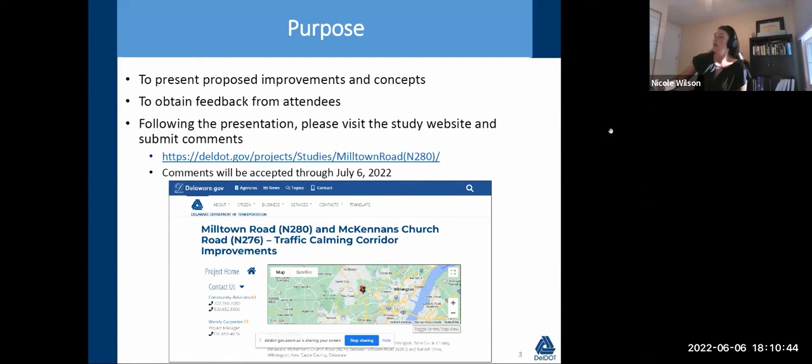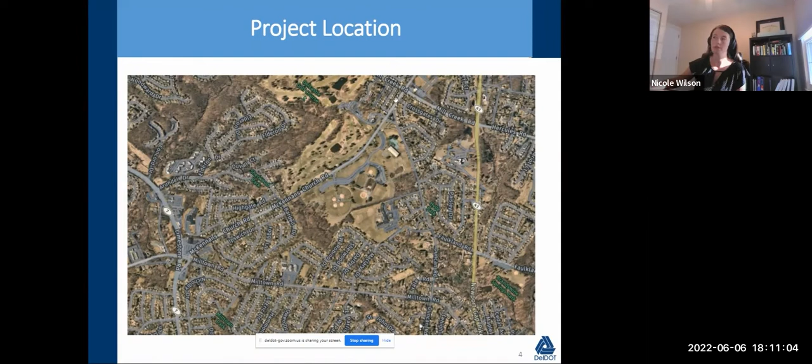So I'm going to go through a little bit of history for each of these corridors really quickly before we touch on our actual concepts. But for Milltown Road, we did collect speed data. There was a speeding issue observed, with the 85th percentile speed of 48 miles per hour.

After that, we did install one radar speed sign in 2020. We did a truck restriction inventory as a result of some other concerns regarding truck traffic on the roadway. And then we did a speed limit study in July of 2021, which didn't recommend a reduced speed limit. After that, we put a radar speed sign in the opposite direction and did a further truck restriction inventory on the ends of the corridor.

So here's a slide for the McKennans Church Road history. This one goes back a little further. I found some history on police enforcement in 2017, but then we did collect that speed data, which also showed an 85th percentile above the posted speed limit. We conducted a speed limit sign inventory and a speed limit study, finding that a reduced speed limit was warranted north of Bardell Drive—used to be 40, now it's 35. Additional signage was installed for speed limits and no passing on the shoulder. We also have radar speed signs, now 2 on this corridor, with the most recent one installed last month.

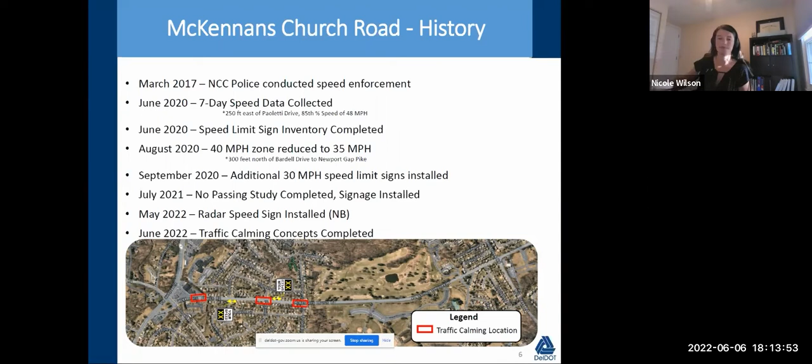Just a real quick slide—we wanted to touch on the existing conditions of each of these roads. They are slightly different, but they both did have speeding issues, with the 85th percentile 11 to 13 miles per hour over the posted speed limit. So this is why we are looking into these traffic calming options.

And we did take a look at the crash data, which we wanted to note here. As I said, each of these roadways is a little bit different, but on Milltown Road, half of them were injury crashes, and McKennans Church Road did have a lot of crashes in the past 3 years. This is our existing conditions, and if we move forward with these traffic calming options, we'd like to see how that changes in the future.

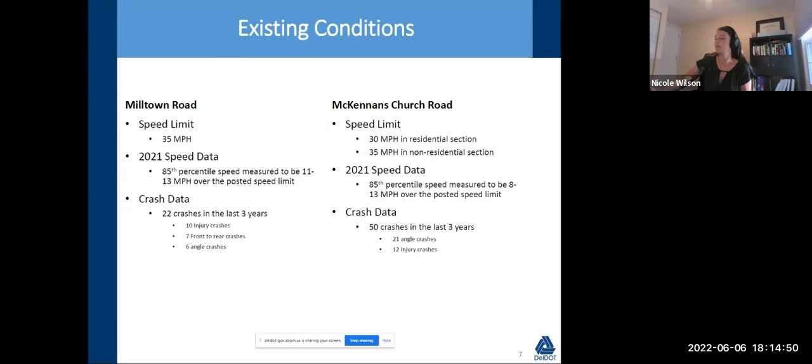So what are our proposed improvements? We are suggesting median islands with pedestrian crossings and rectangular rapid flashing beacons. This would provide physical roadway narrowing and horizontal deflection in the roadway, as well as a safe pedestrian crossing to get across the street. These would be activated by pushing a button, so they wouldn't be flashing all the time, only when a pedestrian is trying to cross, and it would have little to no impact on emergency vehicles.

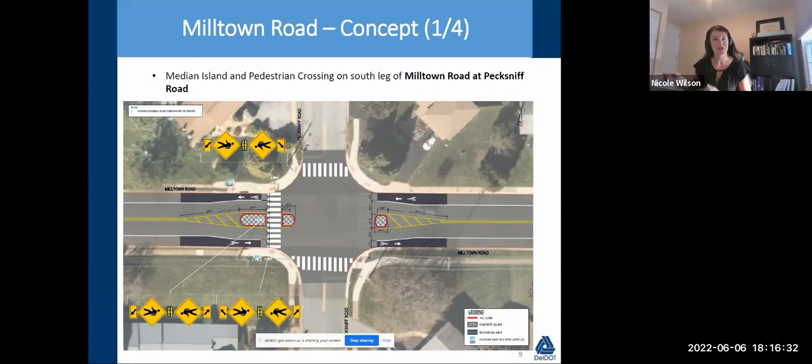As I said, Milltown Road has 4 locations where we're suggesting these median islands. This is the first of 4: the south leg of Milltown Road at Pecksniff Road, where we're suggesting this median island to provide horizontal deflection in the roadway and help calm those speeds down a little bit. I'm not going to spend too long going through each of these—they're all relatively the same thing, just in different locations on the corridor. But this is the first one.

The second one is actually at St. John's Church. This one would provide a connection for those crossing—there's a school there, church activities, things of that nature.

The third one is just south of McClary Drive. There's an existing bus stop on the north side—just another median island. This one is not at an intersection per se; it's kind of mid-block.

And the fourth one is just north of Dartmouth Road. This one would connect those two bus stops as you see in the imagery. But all of these could change a little bit—10 feet to the east, 10 feet to the west—this is the concept plan. So there's still some wiggle room with the exact locations, but this is where we're expecting them. So those were the 4 Milltown Road concepts.

Now I think we're going to the McKennans Church Road concepts. So the first one on McKennans Church Road—I'm sorry, I'm just noticing now this says Milltown Road, but it's meant to be McKennans Church Road—would provide access to the shopping center from the apartments, kind of mid-block, not an intersection, to help slow speeds as they approach or come out of that residential section.

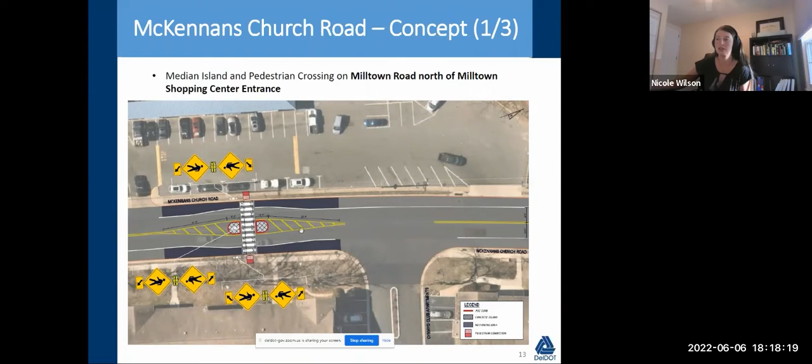The second one of the 3 is just south of Pecksniff Road, on the south leg. This is similar to the one on Milltown Road at Pecksniff—similar kind of design. But again, all of these have these rectangular rapid flashing beacons that you can press to cross the roads.

And the third one is just on the south leg of Bardell Drive. So again, these are all very similar. We just wanted to show you a detailed look at how this would affect certain driveways or intersections, things like that.

We did want to talk about the project schedule and next steps. Today was our working group meeting, with a comment period going out for one month. So we could initiate the design phase this fall, with an anticipated construction phase of fall 2023 or spring 2024, pending anything we find in the field that could cause challenges for these designs.

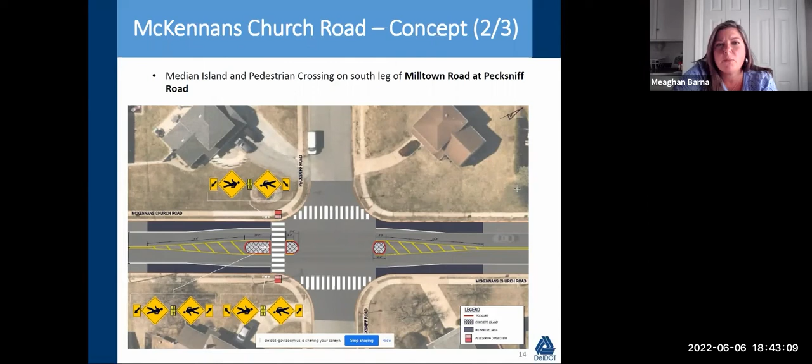Okay, we have a question in the Q&A. Will through traffic past St. John's during morning and afternoon school use be accommodated when the project is completed? Through traffic. So I want to make sure I'm understanding this. So through traffic, not just at the St. John's crossing, but at any of the locations, is not being changed.

Because again, we're not removing a lane or putting in a restriction that would deter, say, the movement into an access point, such as a driveway or the St. John's Church. So if I'm not answering this question based on the context of it, please raise your hand and you could talk a little bit more in context with regards to that. But again, through traffic is not being changed or diverted, whether through construction and or through the project, because we're not removing a lane.

Okay. My question was raised by one of my constituents. I'm the president of the Sheridan Square Limestone Gardens Civic Association. And his concern was, as it stands now, when St. John's School is in the morning or in the afternoon, and I guess also before and after church, there are crossing guards out there and traffic backs up considerably both ways, but they're still allowed through traffic on the sides. And his concern was, will that be cut off now with this new project?

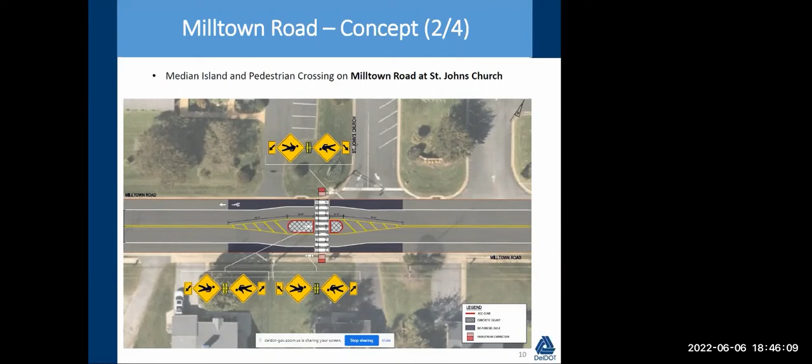I'm hearing your answer that it probably won't change from the way it is now, being an inhibition to traffic on Milltown Road during those times. Correct. We're not changing the volume or distributing volume in a different manner. This is a safety deployment application that's honing in on the speeding concern and then tying into the pedestrian safety component. Okay, thank you.

Can I just follow up with that, Peter? I'm looking at the slide and I want to make sure I'm reading this correctly. The crosswalk there already exists, and that is where the blinking light is. And then to its right, I see what looks like arrows coming out. I guess that's the driveway. So there's no impact there. Correct. Okay, I just wanted to make sure I was reading that correctly. Thank you.

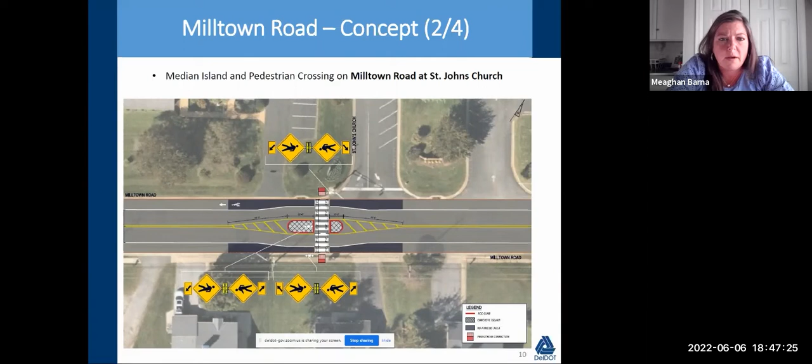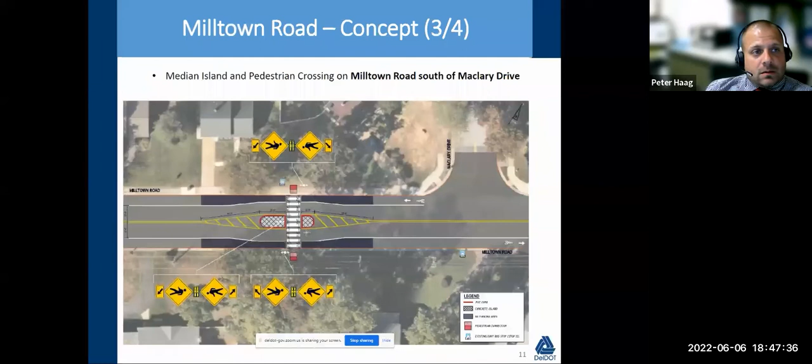Okay, the next few questions. Why have we decided to stop at Dartmouth instead of continuing to Duncan and beyond towards 41? There's also some concerns with law enforcement and that effectiveness. So Nicole, correct me if I'm wrong. The entire traffic calming effort looked at Milltown Road from Dartmouth to the McKennans Church intersection.

If we were to look at Duncan and Milltown Road, we would look to deploy signalized pedestrian crossings versus a rapid flashing beacon. You wouldn't mix the two at a signal. You would put a different type, tying into the existing intersection signal at Milltown and Duncan Road. But it was more about looking at it from a feasibility of construction and design: where could that traffic calming feature be deployed?

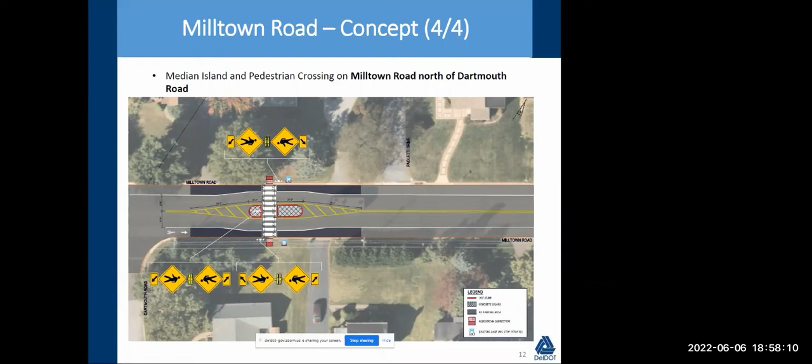Peter, would it be helpful to also just mention how this project's going to be paid for? Sure. So in traffic engineering, we have a funding source and program that is provided by FHWA. And so we're going to utilize that program to fund it with federal dollars.

When we get through the design, because designs of this nature typically take about 10 to 12 months, if there's no design constraints, when we think of utilities and right of way, if we have to get into drainage, that's why some of these things from a concept level might shift a few feet here and there so that we could try to avoid those obstacles. But once we get through the design, we're set, and we've already identified that these two corridors are a priority and would be funded through that federal program.

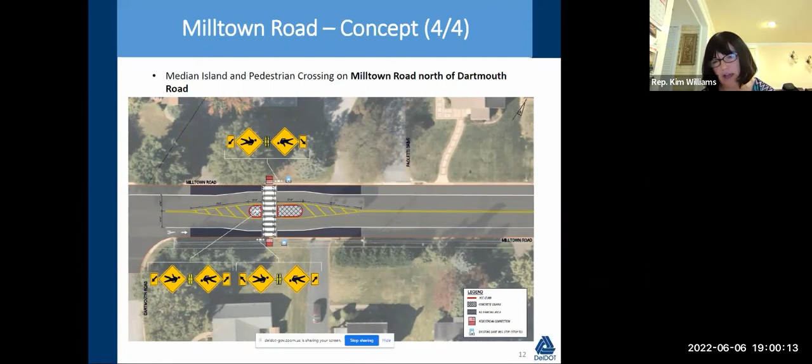And one more follow-up. If we were to go through WILMAPCO and request them to look at the sidewalks, typically how long does a WILMAPCO project take in order to get on the books? Because I know Spiros and I are doing the roundabouts right now in Marshallton, and that has taken quite a bit of time for us to even get to the point where we're going to actually have a project before us. So can you give us an idea how long for them to look into it, make a decision, and for the project to actually happen? Do you know?

I do not, but with regards to the experience with Marshallton, I think I was a part of that almost a decade ago, when those conversations either first started or were in the study period. And then it was prioritizing it and getting into the CTP. A lot of those long-term, large infrastructure impact projects get prioritized through WILMAPCO. It can then be identified as a line item in the CTP, and then it works through the funding, the right-of-way acquisition, the design phase. So it is a longer process.

That's why I'll certainly circle back with WILMAPCO to see if this corridor has ever been studied, what would it take, things of that nature. Thank you.

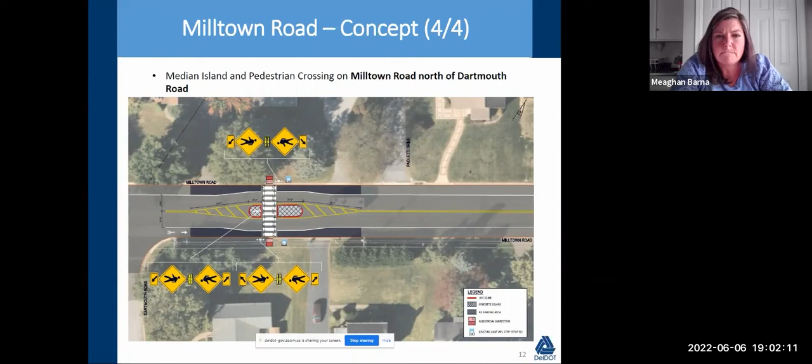The next two questions, again, are circling back to walking. Carolyn's question is specific to the speeding from McKennans Church up to Cooper's Farm area. Not sure where that is in relation to what we're looking at now. So, I think it's along Milltown.

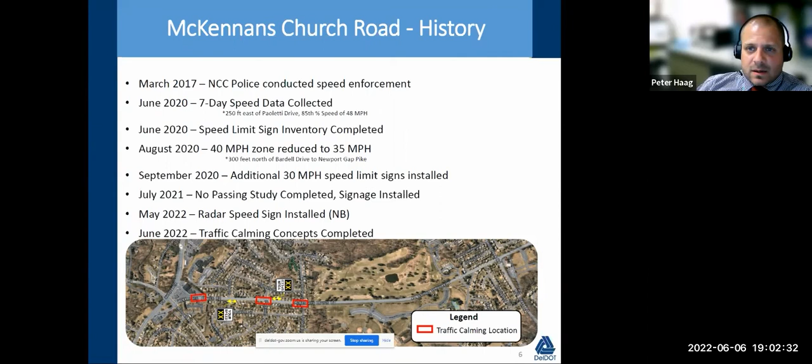If I'm not misinterpreting the question, I believe the question is in regards to, as a motorist is approaching the calming or the application as you're coming from McKennans Church Road, and you're traveling along the corridor, you could see the speeding in between the two points. But again, with the deployment of multiple applications in a row, the goal is that there may not be as high of speeds being driven, because we're narrowing it down and we're having what we'll call a pinch point along the corridor, so that it's physically

forcing a driver behavior change, with the goal of then those 85th percentile speeds that are a lot higher. Right now we're showing about 48, so around 50 miles an hour compared to the posted that's at 35. The hope is bringing those 85th percentile speeds down to a more reasonable threshold or condition

than what is going on today, where there's no application or no calming devices along the corridor outside of just signs and striping. So you could see some influx of speeds in between. But again, the goal of this is to try to capture and bring that speeding down as a whole.

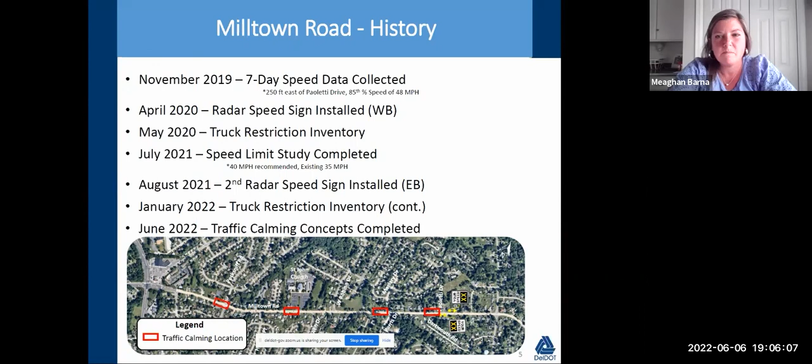Sorry, my fault. When the project is complete, is there going to be any type of communication put out letting motorists know that, say, when they cross over, if they're coming from Limestone or from the other side of Milltown Road, these medians are going to be there, the signage is going to be there? From a county perspective, is there going to be any type of communication?

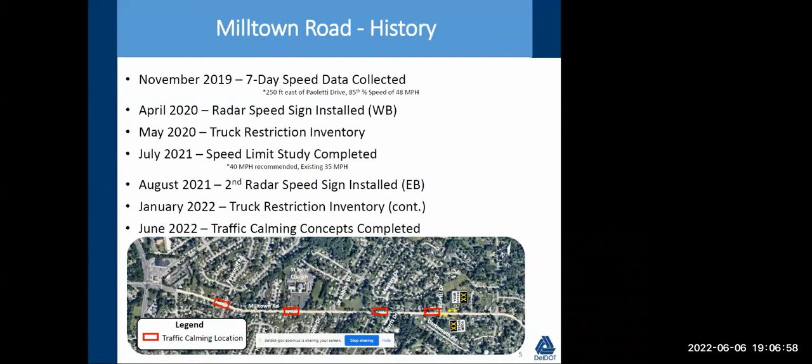Because, to Antonio's point at the beginning of the conversation, right now there isn't a lot of pedestrian crossing. You have a few. I use it because I like to run in the mornings, and I'll cross the streets when I can. But just so that people are aware that this project is going to be happening and they're not flying down the road and all of a sudden, oh wait, the road's narrowing, and then we have accidents.

So prior to even going to construction, there would be press releases and communication that we provide that we're getting ready to start this project. And then throughout the project, there's various aspects with regards to what is occurring with the work zones. If we need to deploy message boards with regards to construction activity or things of that nature, we could certainly look at incorporating them and pursuing them.

After construction, we're going to have staff deploy resources so that we can measure the outcome of the deployment and the constructability. What are we seeing data-wise from a speed perspective? What are we seeing crash-wise? As part of the deployment of the devices, we would install the necessary signs and pavement markings needed to warn a motorist of what is out there.

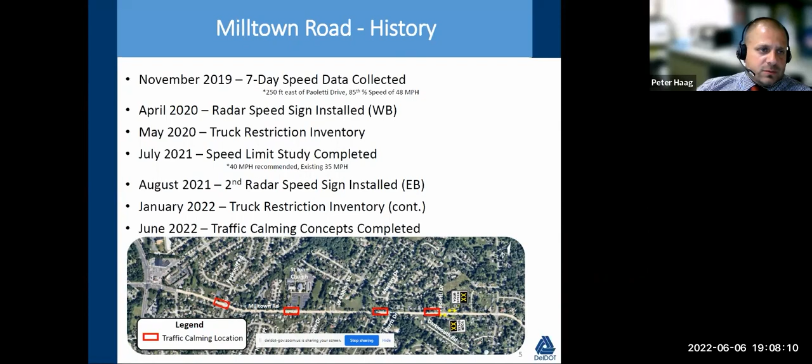That's why, Nicole, if you go to the existing location slide. Similar to what we have at the Polly Drummond and the Dobbinsville Route 9 location. Polly Drummond is the one on the left and Dobbinsville is the one on the right. We would deploy the necessary devices as part of that implementation process.

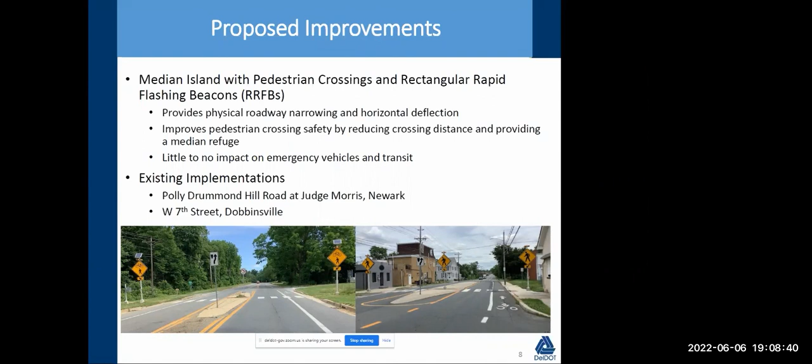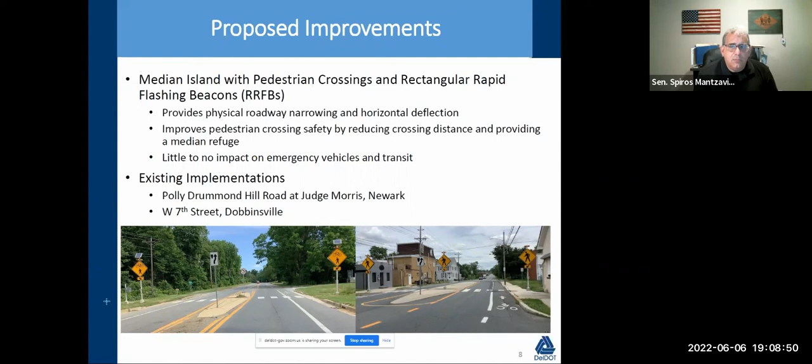Okay, thank you. I don't see any more questions. Can you go through next steps again? I think there's some folks, I know we talked about what the phases are here, and what the timeline can be, what hopefully could be the most accelerated timeline, and what our next steps are.

Sure, perfect Nicole. So tonight we're meeting with the working group. Our immediate action is to upload this presentation to the website so that anybody can share the website and the information with their neighbors and community members. Over the course of the next month, we'll be monitoring to see what kind of comments and Q&As we've received to date. Based on that information, we could move right into the design.

We could probably, from an accelerated standpoint or schedule, start this summer to get into a design perspective, at least looking at preliminary information, understanding utilities, things of that nature. But over the course of the fall and winter is when we start getting into the detailed design plans for the application on both corridors, with the anticipation that we'll have the funding available to us July 1st of next year, July 1st, 2023.